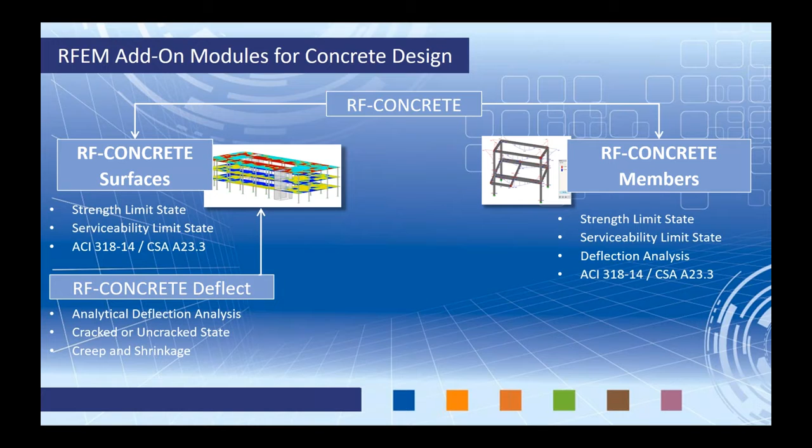Now, as I just mentioned, we do have the add-on module extension RF-CONCRETE Deflect. So RF-CONCRETE Surfaces is required in order to activate this module extension. This allows us to take a look at the analytical deflection analysis of 2D surfaces in the cracked or uncracked state with consideration to creep and shrinkage.

And finally, we have the module extension RF-CONCRETE Nonlinear. Now, this is applicable to both the surfaces and members module, and this allows us to run a nonlinear calculation for the serviceability state only in the cracked state. So we won't be using analytical equations or factors, but we'll actually come up with the cracked section properties and rerun this within the stiffness matrix to account for those nonlinearities. Now, we won't be getting into this today, but just keep that in mind that that is a possibility if you're looking for it.

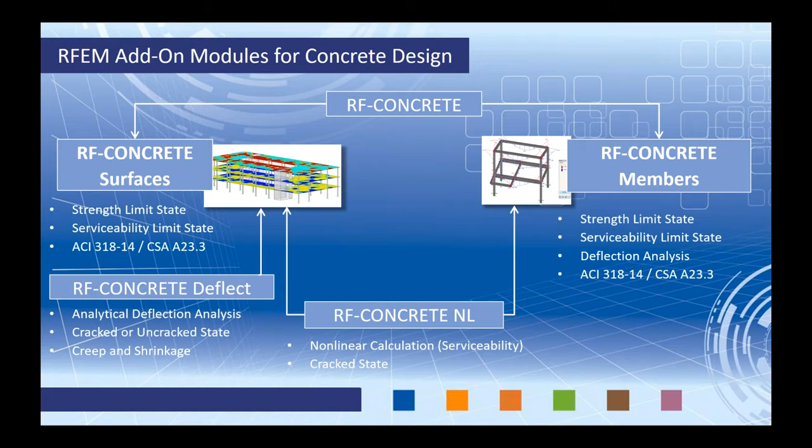So we are ready to jump into our example today within RFEM. So for the sake of time, we won't be able to model the structure from scratch, but rather I went ahead and created this two-story concrete building.

And you'll notice that we do have several surface elements. The surface elements comprise our elevated slabs at both the first level and our roof level. Now, those same 2D surfaces are also utilized for wall elements, and you can see these in the vertical direction here. Surfaces do allow you to apply any type of opening within them.

So you can see that this might be some type of garage opening. We have openings for our doors, for our windows, and for our stairs. And this is all accounted for within the analysis.

Now, you'll also see here these symbols, light blue here, that are located at the joints where our vertical walls intersect our elevated slabs. So what exactly are these? Well, this is what's called a line release. A line release can be placed on any line element within the model, but in particular, we have added them in at this joint where the walls intersect the elevated slabs.

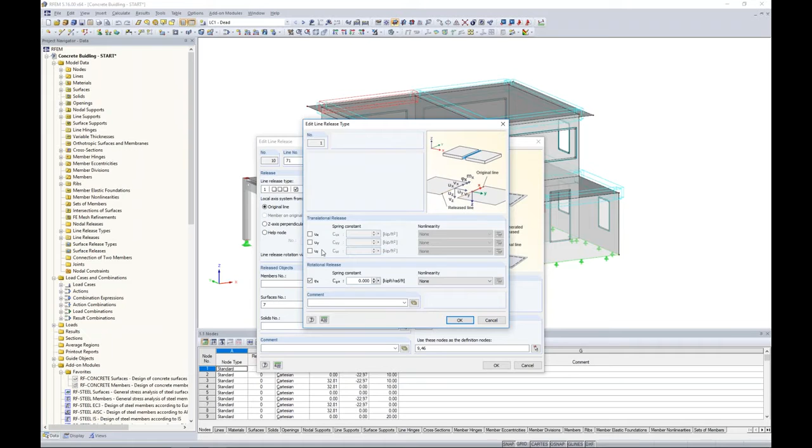The line release type, if we open up the detail settings here, has completely released the moment. So we will not have moment transfer at that joint. You'll notice we also have translation here in the local X, Y, and Z. Keep in mind that these are the local axes of the line element itself.

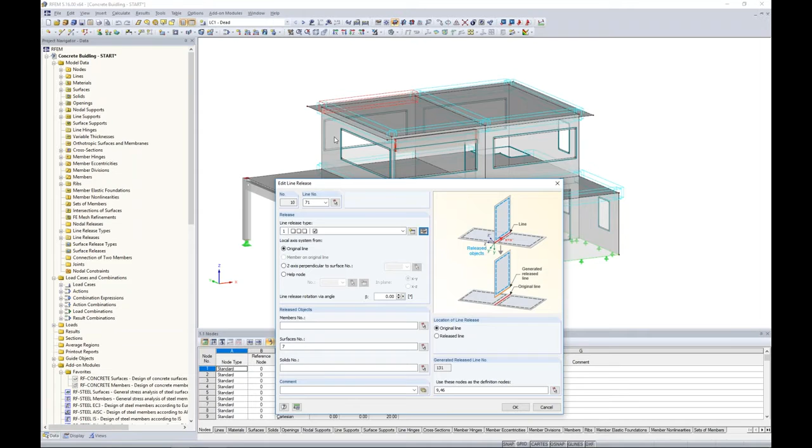Then we just simply apply it to a particular line. We release the objects, and in this case, it's surface number 7, which is my vertical wall on the other side. So now we won't get any moment transfer between those walls to the slab elements.

Under the display settings, we can scroll all the way up here to the top and we can turn those off. So they'll still be taken into effect within the background, but if it seems to get in our way when we're viewing this graphically, then we can go ahead and turn on and off elements like those within this display option.

So moving on to the members, also within this display in our Project Navigator, I'm going to scroll all the way to the bottom. Here we can change the graphics, the colors in the graphics, according to some different elements.

And the one I'm going to choose today is the member type. So the member types are 1D member elements within our software, but you'll notice that they are color-coded because they are different types of members. The first one to notice are our columns, and these are the member type beam.

Well, a beam within RFEM is just any typical type of member, such as a normal beam or normal column. Nothing too fancy going on there. So that's why these typical columns just have the member type beam.

Now, in turn, we have these pink colored members, and these refer to rib elements. Looking at a rib element, we can see here the member type is set to rib. We can expand the detail settings here, and what a rib allows us to do is to define the effective width on either side of the beam element with the slab modeled adjacent to it. So here we can set the effective width either as L/6, L/8, or we can manually type that in.

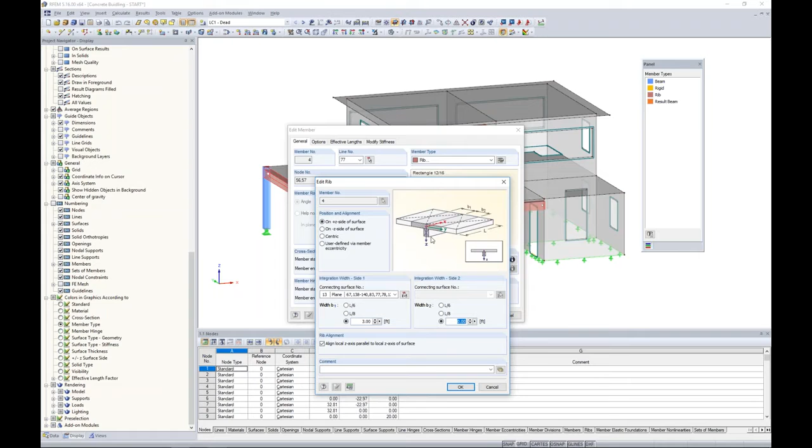But we can fully consider the effective stiffness here for the slab element with the beam, and later on we can even design this rib type member in our RF-CONCRETE members module.

The last type of member that I want to point out is something that we call a result beam. Now, a result beam is very special in the sense that we're not actually modeling any type of beam member within this model when we're using a result beam. It adds absolutely no stiffness to the structure.

But I have placed it above this wall opening, which we can see here, highlighted as the wall with the opening, and I placed this result beam right above it. Well, what a result beam does, if we double click on it and we take a look at the expanded settings, it will actually integrate the stresses and forces within a cuboid. So I've set this cuboid to 2 feet 1 inch in the vertical and horizontal direction.

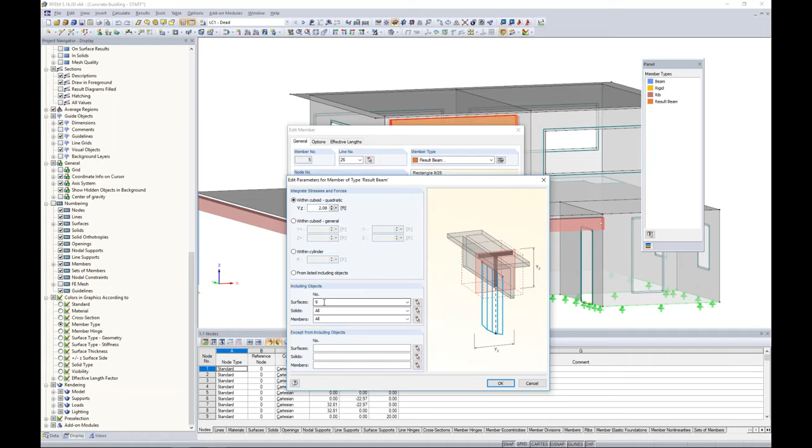So now everything within that cuboid will be integrated and presented to me in a beam-like fashion. We can include only certain objects. So in this case, I only wanted to include my wall, surface number 9. Therefore, I'll get all of the internal forces, stresses, deflections above that wall opening, or spandrel, as we'll call it. And we'll take this into the RF-CONCRETE members module later.

Now, something else to notice about result beams, you don't necessarily have to define it as a concrete member. It could be timber, it could be a steel rod. It doesn't matter because, remember, we're not adding any stiffness. But the reason why I've set it to a rectangular concrete material for this particular case is because I do want to take it into the RF-CONCRETE members to design it later on, which does require concrete shapes and materials.

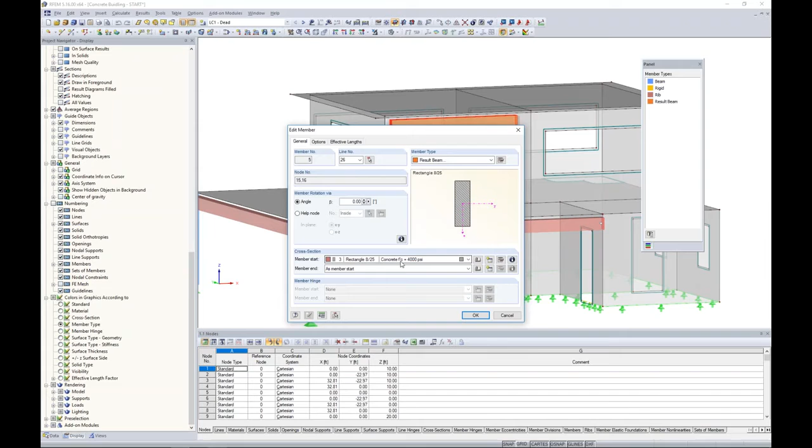Now that we've covered the basics of surface and beam members, let's talk about I-cracked. I-cracked is simply the gross moment of inertia multiplied by a factor, which comes directly from table 6.6.3.1.1(a) within the ACI. The ACI requires us to take into consideration cracked section properties. This factor varies for each element, whether it's a column, beam, or surface. By default, the program automatically uses the gross moment of inertia.

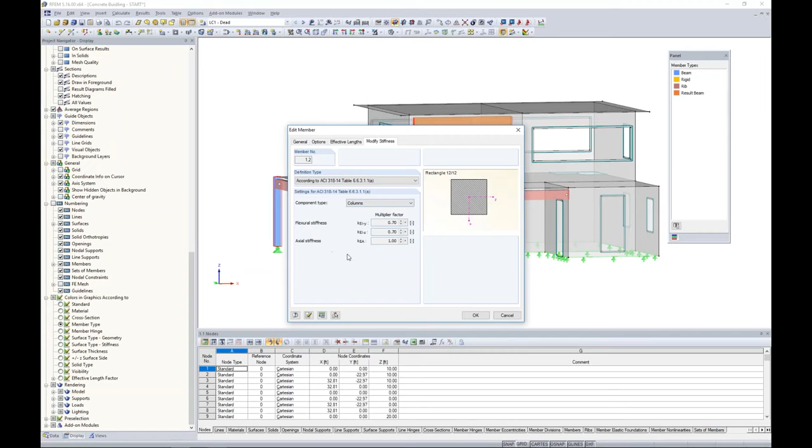So how do we change that? I can highlight both columns at the same time and double-click to edit them. Here we have a Modify Stiffness tab. Within this drop-down box, you'll see both ACI and CSA, since the concept is the same for both standards. Within the ACI, I use the drop-down box to select columns, and the multiplication factor from table 6 within the ACI is applied to my flexural stiffness. That's how we account for I-cracked.

The same thing needs to be done for our rib elements. I highlight both, choose the Modify Stiffness tab according to beams, and the program is smart enough to recognize what type of element it is from this drop-down. We also want to do our elevated slabs, so holding down the control key, I select all horizontal slab elements, edit the surface, and even for surfaces we have a Modify Stiffness tab according to the ACI for flat plates and flat slabs.

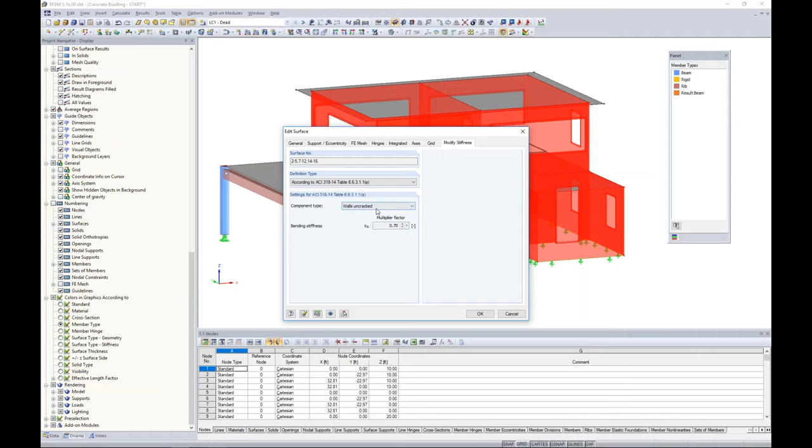We click OK, and last but not least, we have our wall elements. I can graphically choose these with my selection box and right-click to edit these surfaces. Again, under the Modify Stiffness tab, the program gives me the option for walls uncracked or walls cracked. We'll go ahead with walls uncracked for this example today.

You'll notice I did not apply an I-cracked consideration to my result beam. The reason is that we're just creating a summary of the forces and stresses within this wall panel. I've already considered I-cracked for the wall, so there'd be no reason to also do it for a beam type element. In fact, if you look at the result beam, we don't have a Modify Stiffness tab anyway to make that change.

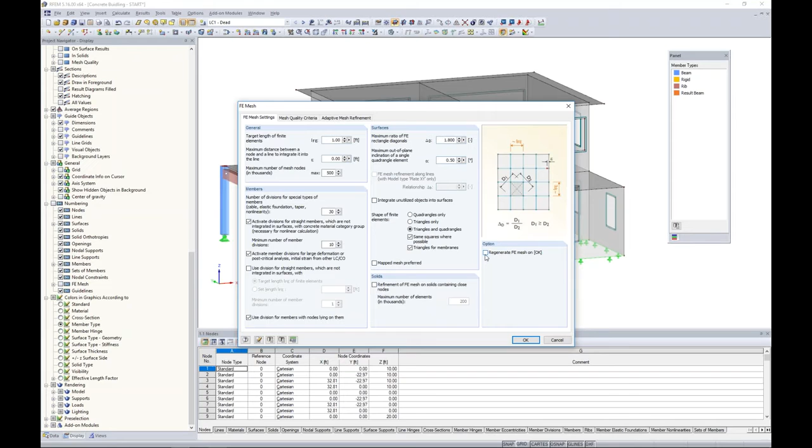One more concept to look at before the loading is our FE Mesh. Under Calculate FE Mesh Settings, the global FE Mesh is by default set to 1 foot. You can adjust this as necessary, but taking a look at the 1 foot mesh setting today, we can regenerate the FE Mesh.

Let me turn this into wireframe view. You can see the program automatically meshes everything for us — nodes, members, openings, everything is automatically meshed and tied together, so we don't have to take care of any of that manually. Keep in mind you don't even need to mesh the model before running an analysis; this will automatically always be done. I just wanted to give you an idea of what's going on in the background.

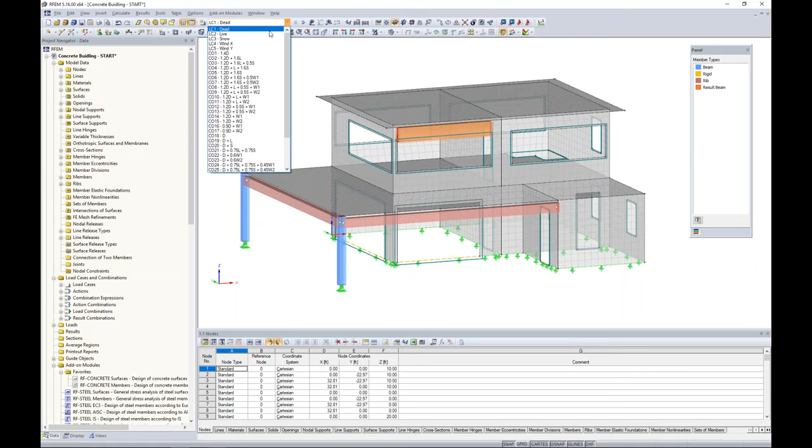Lastly, let's look at the different loads I've placed on this structure. I've applied different loads according to dead load, live load, snow load, and so on. These are just simple surface loads. For dead load, you can see those acting in the vertical direction on all elevated slabs. Same concept for live load, but only applied at our second level inside the building.

Snow load, I've accounted for some high drifts closest to the wall surface bases, in case we want to take into consideration the analysis for high snow loads. You can see those applied here. Lastly, we have our wind loads. We can see an external pressure being applied in the global X direction, as well as some wind loads applied on the inside of our structure for an outward pressure. Same concept for wind in the Y direction, except we're just rotating the directions 90 degrees, so we have wind in the global Y direction with the surface loads applied.

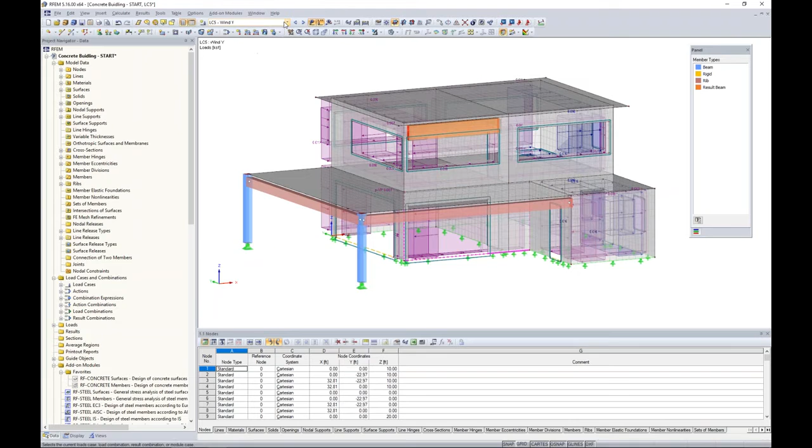Now jumping to the load combinations, I can open up my load combinations tab. We can see here the program has automatically generated all of my LRFD load combinations denoted by this orange color. The program has also created my ASD load combinations. Both of these combinations are going to be used later on for design within the concrete modules.

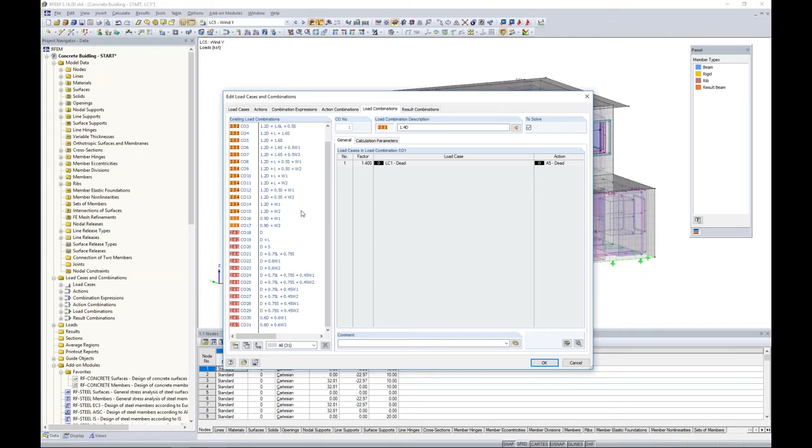If we jump back to RFEM, we'll see all of these same load combinations available in my dropdown, and I can actually see the loads being applied stacked on top of each other, one by one within these load combinations. The load factors are also considered here graphically.

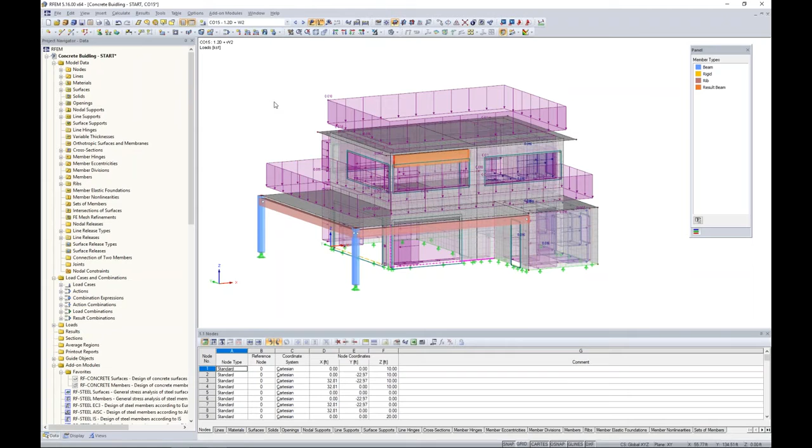So now we're finally ready to run our analysis. What I can do is just go to calculate all, and the program's going to cycle through, first of all, my load cases and then all of my load combinations. Keep in mind, for load combinations, the default is a nonlinear analysis taking into account secondary effects such as P-delta. So for every iteration, our stiffness matrix is being adjusted to account for those P-delta effects. We're also taking into account those stiffness modifications from I cracked.

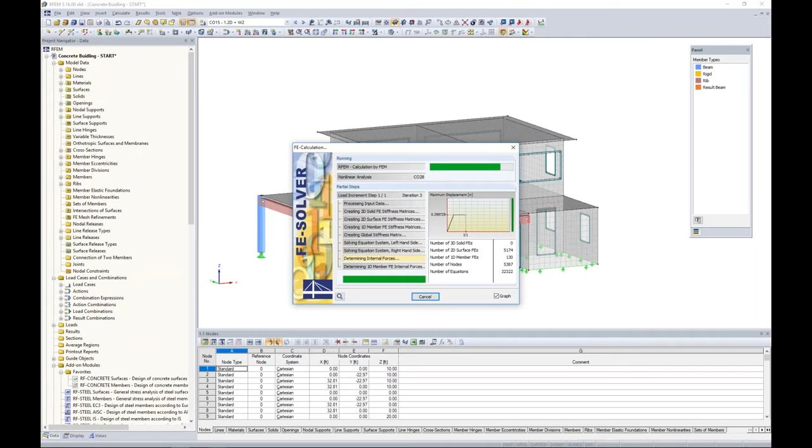Once the analysis is done running, we will be presented here with our results directly in RFEM. The results are available here under the Results tab within the Project Navigator, and we can quickly take a look at our deformations. Turning this into wireframe view, we can cycle through these different load combinations up here in our toolbar, and for the most part it looks like gravity loads are affecting the structure.

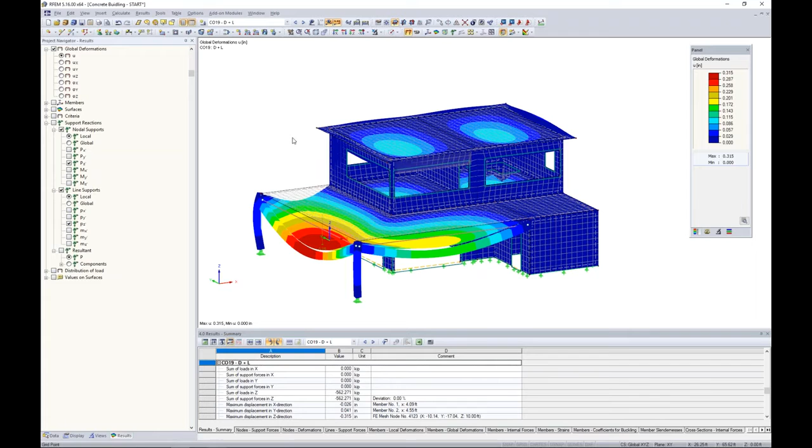Deformations aside, we're most likely for concrete design very interested in internal forces, especially for our members. So what we can do here is jump to the members tree within our Project Navigator to go ahead and display the internal forces. For example, I'm looking at the axial loads within my column and my rib members.

We can also take a look at shear loads, maybe we're interested in that for those rib members. Bending moments, of course, we want to use for our tension reinforcement design, and so on.

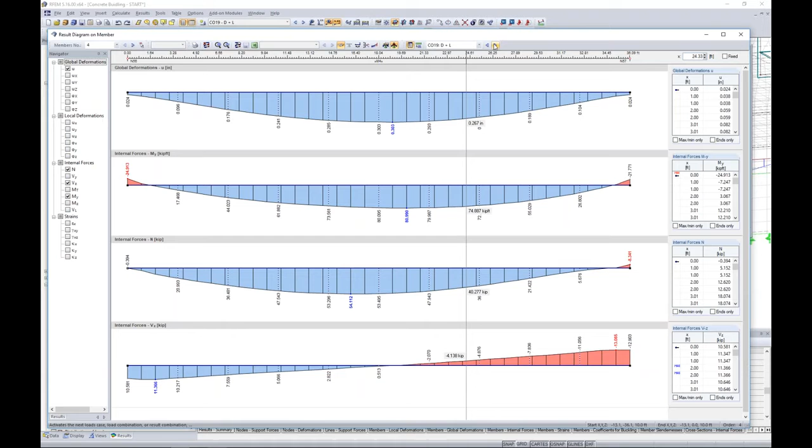We can always right-click on one of these members to go to the results diagram. The results diagram allows us to turn on these internal forces and to see a little bit more detailed look at what's going on along the member length. We can also quickly cycle through different load combinations to see how those forces are changing.

The other thing I want to point out is remember our result beam up here. Let me create a visibility by my selected object here of just my result beam. Remember that this is integrating the stresses from my wall element and presenting it to me in a beam type format. So this is actually the area above my wall opening.

I can view normal forces, I can view the shear forces, even the bending forces all along that wall segment. So again, this is what we could take, not only for the result beam but for all beams, into our own design tools to take a look at the reinforcement design with these internal forces.

The same can be said for support reactions, and let me make this a little bit more clear here. Our support reactions are given to us within this results toolbar, and we can take this into our own design tools to do the foundation design if we'd like.

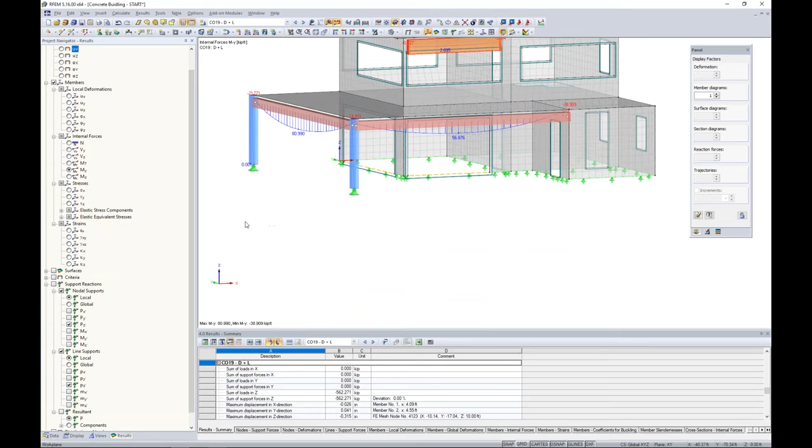So that really summarizes our analysis. Again, I haven't touched any of the add-on modules. This has all been done in RFEM alone, which provides us with a full analysis.

So now we want to change topics and jump to reinforcement design utilizing these add-on modules within RFEM. Going back to my data tab, we can see here the long list of add-on modules available. This is why we have the concept, kind of pay for what you use, because not all people are going to utilize all these add-on modules.

We can always right-click and move a module up to the top of the list by selecting it as our favorite. Also, under the add-on modules option up here at the top of the screen, they're categorized a little bit better so we can see design by concrete and launch the RF-CONCRETE members module.

Now when I say add-on module, it's nothing more than a dialog box available within RFEM itself. All of my loads, my load combinations, my cross sections, my materials are all brought in from RFEM, the main program, into this add-on module. The only thing that we need to define here is a little bit more information about our reinforcement specific to the ACI standard so that the program can go ahead and design that for us.

The first thing to note here is we want to choose the standard. You'll see in this drop-down box we have both the ACI and the CSA standard, as well as Eurocode and a couple others.

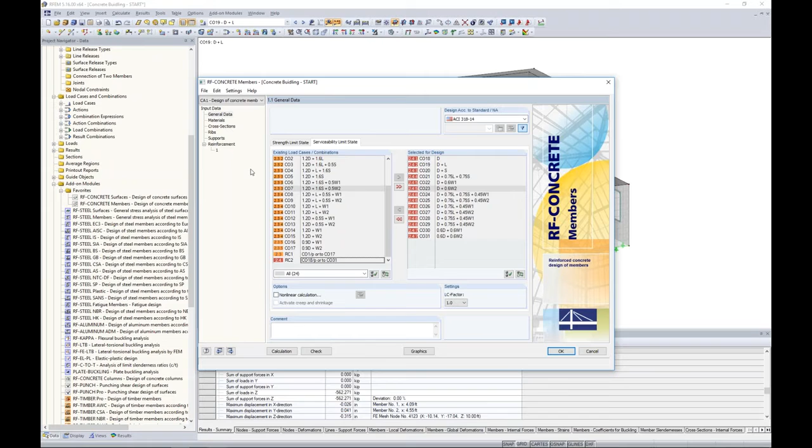Now we just simply need to move down our list here from top to bottom. Moving on to materials, concrete 4000 PSI is brought in from Rfem. Our reinforcing steel is set to grade 60. Material properties are all given to us here, not too much to change.

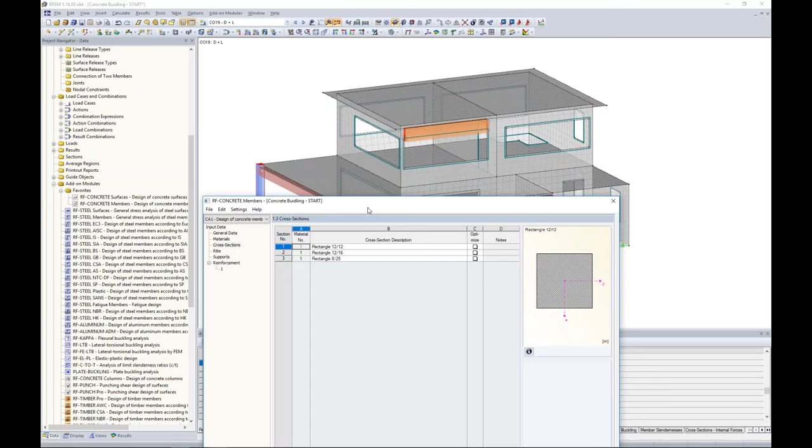The cross sections, same concept. These are my cross sections directly from the Rfem model. Now I know it's a little bit difficult for you guys to see, but as I click through these different cross sections, they are being highlighted in the Rfem model behind me, so I can see exactly which cross sections are located at which parts of the model.

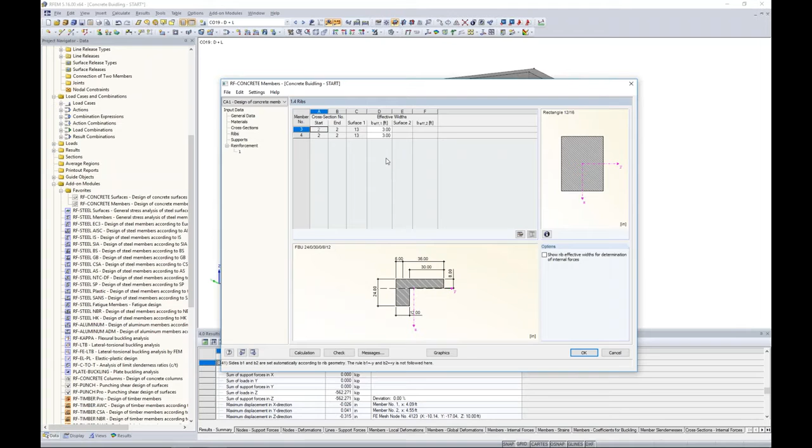The ribs tab is those rib members that we created with the effective width. Remember, I defined an effective width of 3 feet only on one side of my rib member. So that's all brought in from Rfem. Now this is important because we can do the reinforcement design of this effective width section here.

The supports tab is utilized by first graphically selecting a couple nodes. So I'm going to choose both nodes at either end of this rib beam here in the front of my structure. The reason for that is that I want to define my support width, which in this case are my two columns. My columns are 12 inches wide, so we can type in 12 inches for the support width.

Is the column a direct support? What's nice is that this picture updates to let you understand exactly what you're selecting. So is the column underneath the rib, or is the rib framing into the face of the column? In our case, we'll assume that the rib is framing into the side of the column. Is it a monolithic connection, yes or no? And is it an end support? Well, in both of our cases, we'll choose this as an end support.

So the intent of this table is to allow us to reduce the shear forces in the support area according to ACI 9.4.3.2. The code tells us that we can consider the rib element at the face of the column, or even more so a distance of D away from that face, D being the depth of the rib. The shear forces at that location will be used for the shear reinforcement design. The ACI allows us to do that, so in order to not over design the shear reinforcement, we can activate that option here.

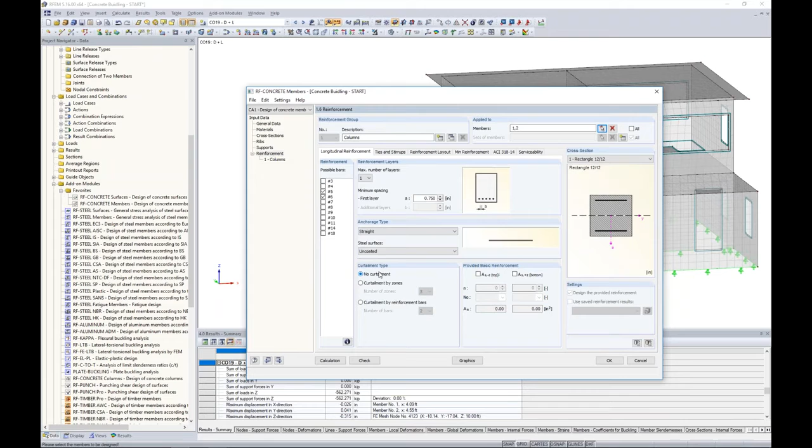The anchorage type is our development length, so do we prefer this to be straight, hook, or a bend? The program will give you all of the dimensions for that based on the ACI standards as well as our applied internal forces. The curtailment type allows us to specify different areas within the member length that might need additional longitudinal reinforcement. A good example of this might be our rib member.

Our rib member is going to have significant bending at the center, but much less bending at the end. So you can set different curtailment so the program can optimize where to put that longitudinal reinforcement in different zones. The option for no curtailment will use the same longitudinal reinforcement throughout the entire length of the beam.

Ties and stirrups, same concept. We just want to choose the possible bars here. For these columns, I'm going to choose number 3s, and we're going to use uniform spacing throughout, which is the default option here. Now, the program can also take into consideration the max stirrup spacing according to the ACI standard, so it will either flag us or design it to make sure we're not exceeding that particular code check within the ACI. The reinforcement layout.

The first thing to set here is the concrete cover. The ACI standard refers to table 20.6.1.3.1 for concrete designation, and for number 5s or smaller that are exposed to weather, the code tells us that 1.5 inches is adequate. So assuming we're using number 5s here, we'll just keep this as the default of 1.5 inches. If the program came up with number 6s for my reinforcement, well, maybe I'd want to go back and adjust this to something more like 2 inches.

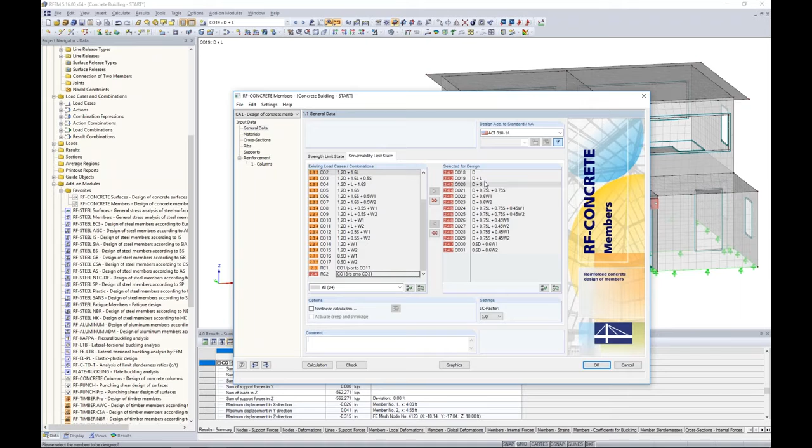Now, lastly, we have our Serviceability tab. Keep in mind, this Serviceability tab is only available because back under the General Data tab and the Serviceability Limits, I've actually utilized my ASD load combinations. If I did not have load combinations over on this right side of this dialog box, then I would not see this Serviceability tab. But today we are designing serviceability according to the ASD load combination. So there are two considerations when it comes to serviceability: we have cracking and deflection.

With cracking, the first thing to specify is the limit value for allowable crack width. Utilizing this first option, limit values, my drop-down box has a few default options, and this comes from the ACI committee, which did some research and put together recommendations depending on where your structure is located and how it's going to be used. For example, water retaining structures are going to have a significantly lower allowable crack width of 0.004 inches in comparison to a structure with a protective membrane or that's located in a dry air environment. For today, let's assume that cracking is not such a concern for this structure. We're in a very dry environment. We don't expect it to see very much cracking anyway. So we'll just set the limit values as 0.016.

Now, user defined, you can manually type in the allowable crack width as well. So below this are two different checkboxes: design without direct crack width calculation according to Chapter 24. The ACI does not specifically give us any type of equation or references when it comes to the actual crack width. Instead, it tells us that we must limit the reinforcement spacing in order to control cracking. So by leaving this checkbox checked, we will check the spacing of the reinforcement to make sure we're adhering to the ACI standard.

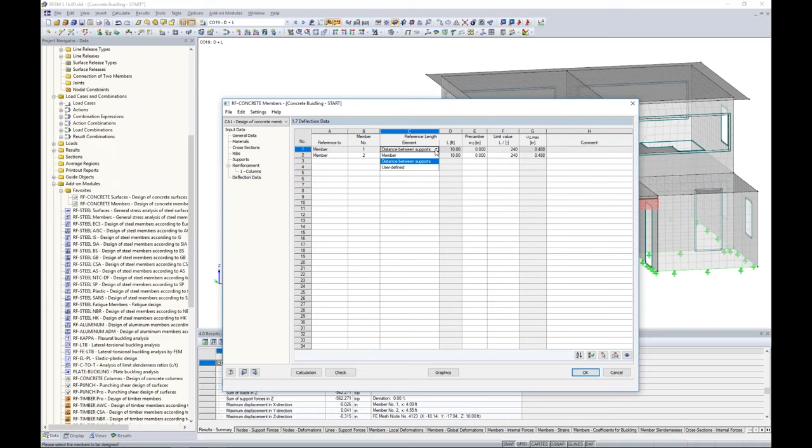Under the deflection data, not much to do here because the program already recognizes that we need to add both columns to this table, member 1 and member 2. The reference length is set as the distance between the supports, the full 10 feet. You can also modify this with these drop-down options. If we did have a pre-camber, we could put that in.

And finally, the limiting values. The drop-down box has a few options directly from the ACI standard, or you can type in your own user-defined value. Utilizing L/240 again from the ACI, I'm telling the program that I cannot exceed a deflection of 0.48 inches. So it will compare the demand deflections from our analysis to these limiting deflections and give us a capacity ratio for serviceability.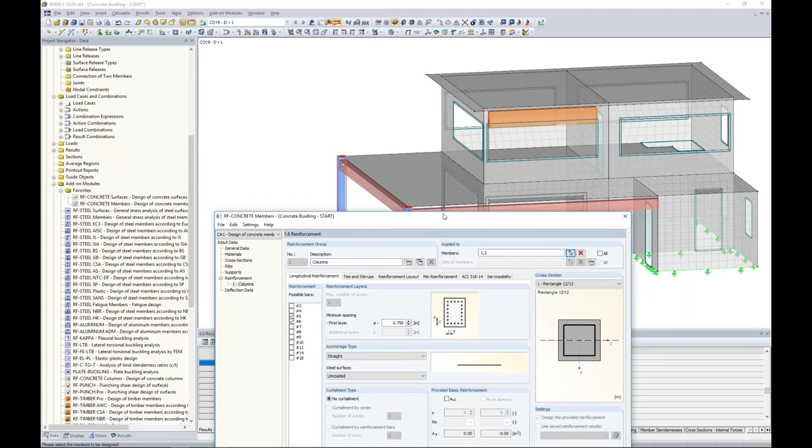So that was a bulk majority of our input information within this module. Now keep in mind, this is only for the columns. So what I'd also like to do is design my ribs and my result beam at the same time. Well, we can do all of this in one continuous step by simply creating a copy of my reinforcement group.

So now my columns are defined here twice. All I need to do is go to a second group, and we'll rename this to ribs. Now for the members, I need to graphically choose my rib members that I'd like to apply this to. As far as the rest of these tabs, most of this will remain unchanged.

For example, the longitudinal reinforcement will still let the program optimize between number 5s or number 6s. The ties, maybe I'd like to increase this to number 4s. I expect to see higher shear here, of course, in comparison to my column, so we'll increase this to number 4s.

And let's use different zones. So therefore, the program will optimize in 3 different zones the spacing. Areas where we have higher shear will have closer tie spacing. Areas where we have lower shear, of course, will have further away tie spacing.

The reinforcement layout, the cover is fine, but the reinforcement layout, well, this is not correct. We certainly don't have a column situation where we need uniformly surrounding reinforcement. So instead, we're going to choose symmetrical distribution.

So you'll notice now we're giving reinforcement at the top and at the bottom, which is more beam-like behavior. For rib elements, we now have the option to distribute the reinforcement over the complete slab width. So we're also going to extend this longitudinal reinforcement over the effective width of our slab. Pretty powerful in the sense that we can design these rib elements directly within this module too, taking into account that effective width that we input in the RFEM model.

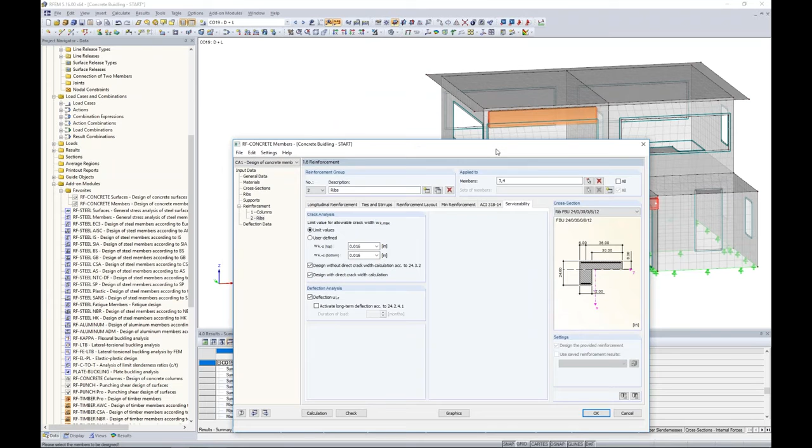Okay, and finally, we have our result beam up here. Now remember, we're just designing the upper portion of this wall above the opening as a spandrel, and we do so by mimicking that it's a beam type element. So creating a copy now of my rib reinforcement group, and you can see here now I have columns, ribs, and my third option, we can rename this to spandrel. Here I can select my member, my result beam graphically within the RFEM model.

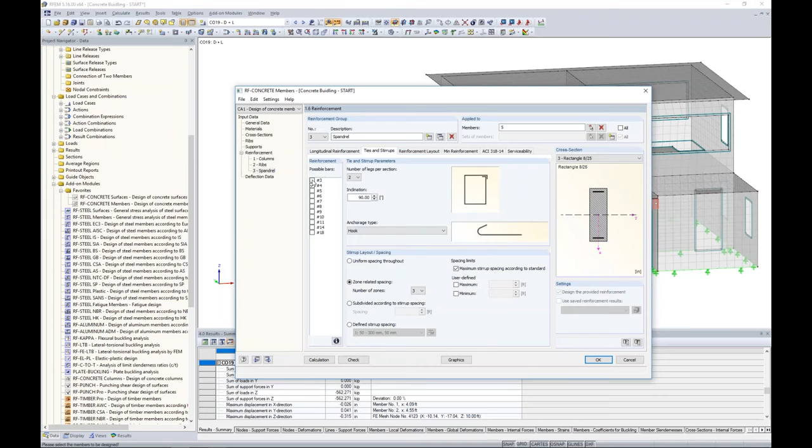And jumping back to my longitudinal reinforcement, this looks fine. My ties and stirrups, maybe we'll jump back to number 3s here with uniform spacing. Everything else remains unchanged. Even the reinforcement layout, by the way, this will look the same as our rib members, but our cross section was updated here.

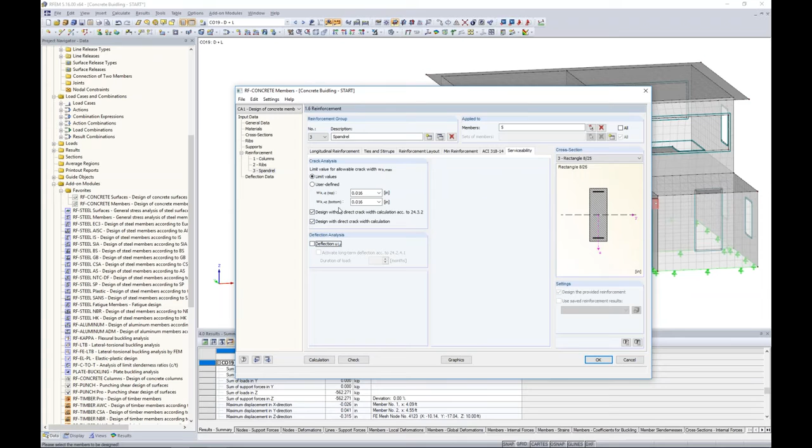Top and bottom reinforcement - the only thing I'm maybe not so concerned about is serviceability with deflection consideration. You can uncheck these options for different reinforcement groups. So I still want to check my cracking, but I don't really care much about deflection. I can simply uncheck that, and now that member will not be included in the deflection data table.

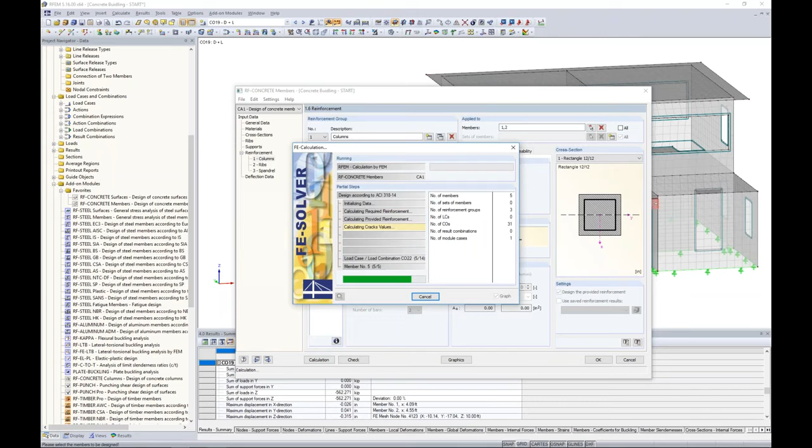Now we've finally defined all of our reinforcement settings for our members, and we can run a calculation. All this is doing is pulling the internal forces from RFEM into this add-on module, applying the ACI equations to give us our actual reinforcement details for each member. You can see it solves fairly quickly.

Now we're presented with our results in table format. The required reinforcement is given first, and we can check it out by member. Again, these tables are synced up in the background with the RFEM model, so we can see exactly where we're at within this structure.

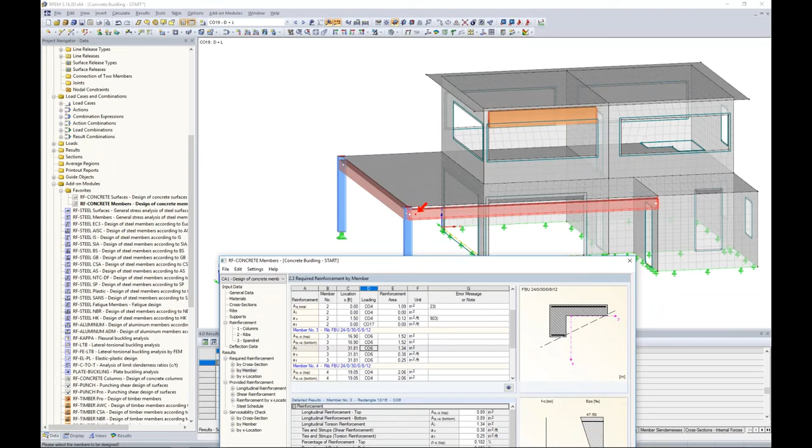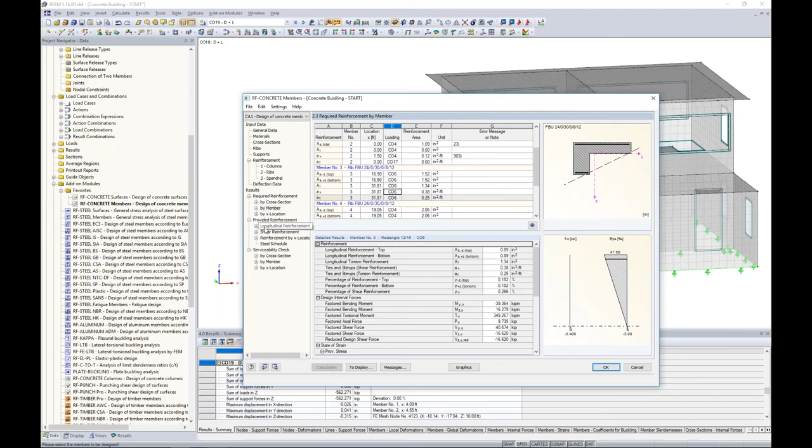Taking a look at our rib members in particular, we'll see the required reinforcement based on the applied loads for the AS top given as such. Now AS bottom, this is all longitudinal reinforcement. We're also given our requirements for shear reinforcement and torsion. So required reinforcement is good to know, but we're probably more interested in what rebars did the program lay out for these particular members in regards to the settings we previously defined.

This is where the provided reinforcement tables can be useful. Here we can see these same members defined. For example, taking a look at the longitudinal reinforcement for my columns, I can look at my rib members here, and we can zoom in to see the longitudinal reinforcement applied at the bottom and at the top.

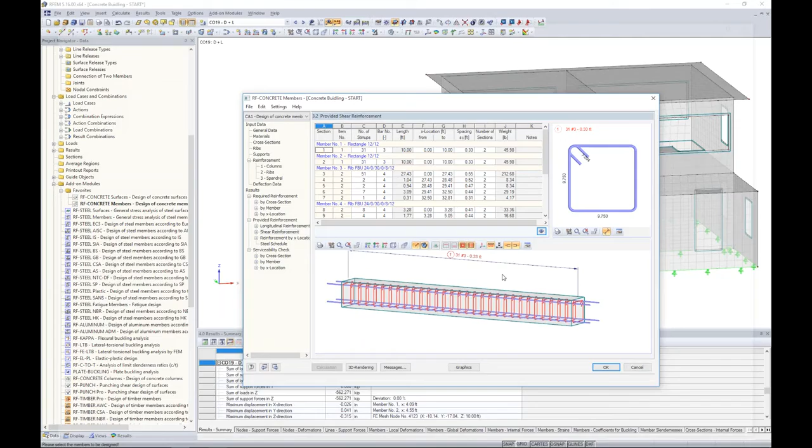Shear reinforcement, same concept - we can see our ties, our stirrups placed along the member length, 31 number 3s at 4 inches on center. For these 3D drawings, you can always double click on it, and up pops a nice rendering of exactly what our reinforcement looks like for both the longitudinal and the ties.

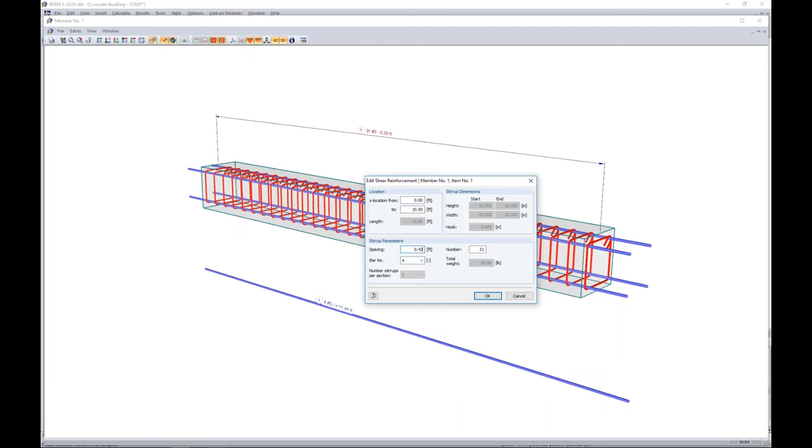If you want to make quick changes - for example, I'd prefer to use number 4s rather than number 3s - I don't necessarily have to go back to my original input data. I simply double click on this call out, and I can change the bar number to number 4s, and maybe increase my spacing to 0.425 feet on center. I click OK, and the program automatically updates the picture.

I can exit out of this picture, and when I click into another table, the program says, wait a minute, you made a change, I need to quickly recalculate this to make sure you're still meeting all the ACI limitations. So I've made that change to my shear reinforcement for my column - it's reflected here with 24 number 4s, but I'm getting a note now, which I can read under my messages or in the lower dialog box: the bar spacing is greater than the maximum spacing. That's telling me something doesn't adhere to the ACI standard, so maybe I need to go back to number 3s or decrease my settings there.

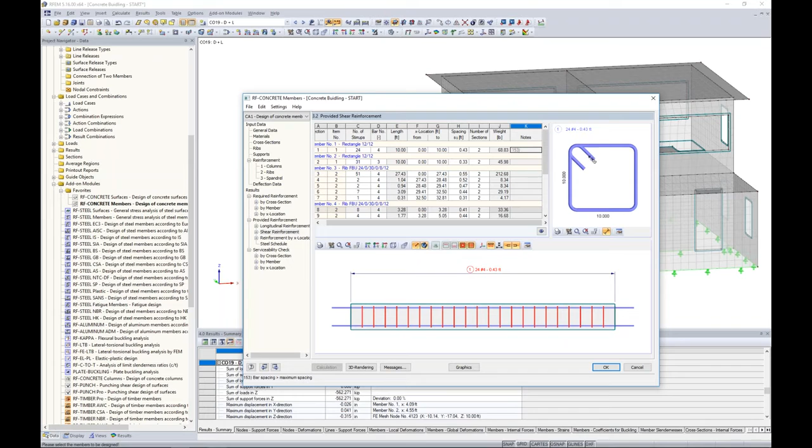Lastly, we have our serviceability check. Remember, we were checking deflections, and also the spacing of our reinforcement and the crack width. Ultimately, for our different cross sections and members, we're getting a capacity here for serviceability. It looks like in this case, the deflection is controlling at the mid-span, denoted by this big red arrow for our rib member, and we get a serviceability check of 0.94 - but we're still less than 1.0, so we get our nice green smiley face.

The tables are nice, but it's also beneficial to see what's graphically going on within our module or within RFEM. What we can do is click on the graphics button down at the bottom, and now we're back within RFEM, but still technically in this add-on module - you can see we're in RF-CONCRETE members.

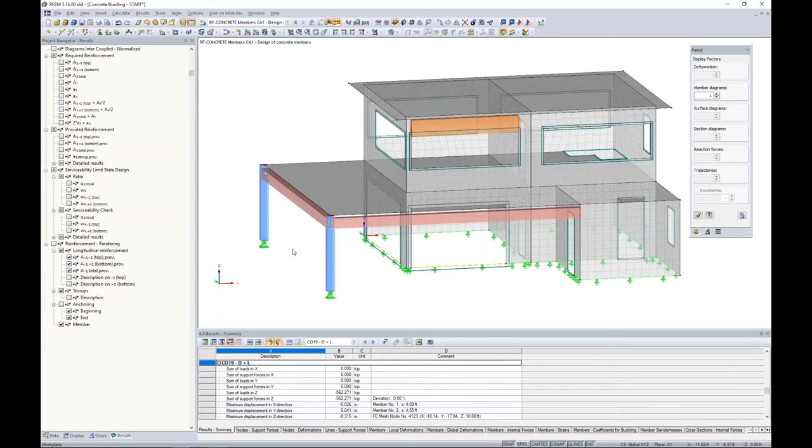So this is all my reinforcement results details from the module. Now focusing in on a rib member, we'll highlight it and create a visibility by selected objects. Let's turn this into wireframe view and zoom in here a little bit. For this rib member, we can display a diagram of our required reinforcement at the bottom of this member - this member is in positive bending moment, so we need reinforcement on the bottom, up to 2.06 inches squared per foot. That's just the required reinforcement.

Well, I can overlay on top of this the provided reinforcement. So this is what the program has determined to put into this beam member with our number 5s, and it comes out to 3.88 inches squared per foot. You can see the provided reinforcement should always be greater than the required reinforcement. Otherwise, we should be a little bit concerned with our concrete design not meeting the minimums.

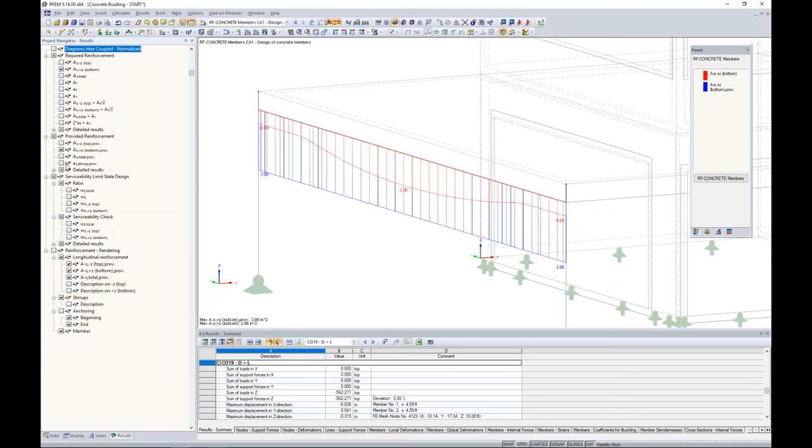Now you can go ahead and display all these different diagrams. What's also beneficial is we can display the rendering of the reinforcement for both the ties and the longitudinal reinforcement directly within the model. So we can see here, even with these rib members, we're able to see the longitudinal reinforcement within the slab. Shear spacing, our 3 different shear spacing zones are displayed here. Now any of this can be added to our printout report for recommendations on how the overall rebar reinforcement design will be done.

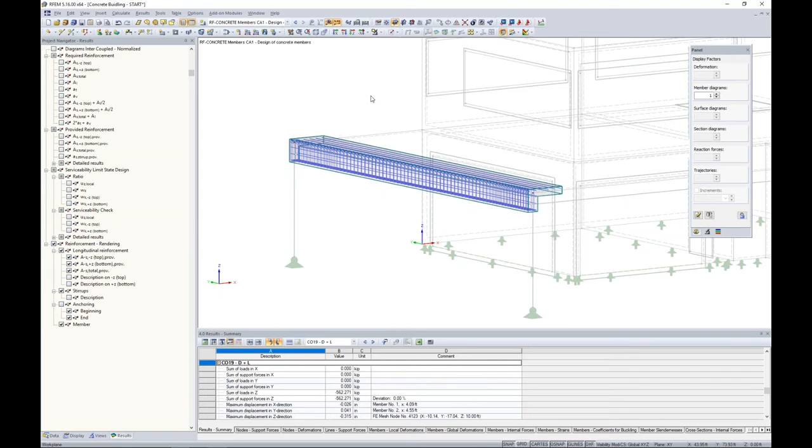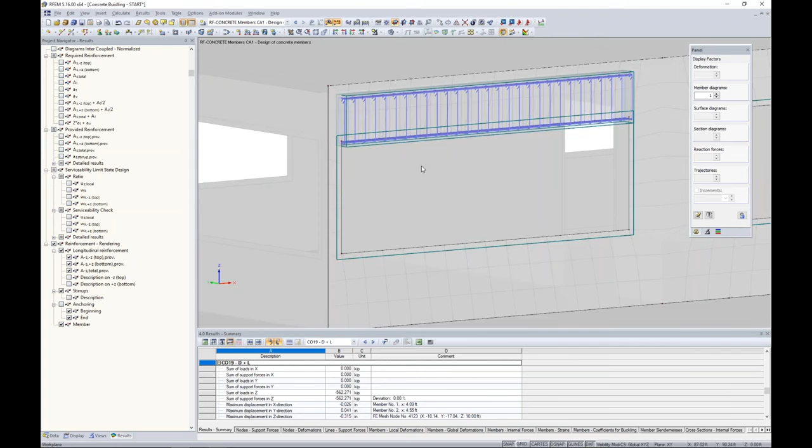Okay, so the other thing to quickly point out is our result beam. We're going to cancel out this visibility mode, and maybe we highlight our result beam here along with our wall panel, create a visibility by the selected object. So here we can actually see the reinforcement above that wall opening. It was designed like a beam member. So we have our longitudinal reinforcement shown here, we have our stirrup shown, and this is all meeting the design demands of this wall panel above the opening. So again, this is how result beams can be utilized along with surfaces.

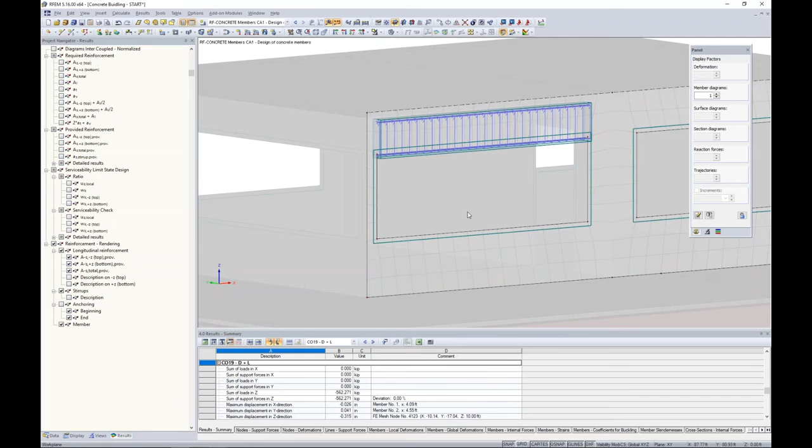Okay, so now we have completed the member design. We're also interested in the surface design. So for this, I'm going to cancel out my visibility mode, and we'll turn to the normal view here of Rfem, and we'll jump to RF-CONCRETE surfaces.

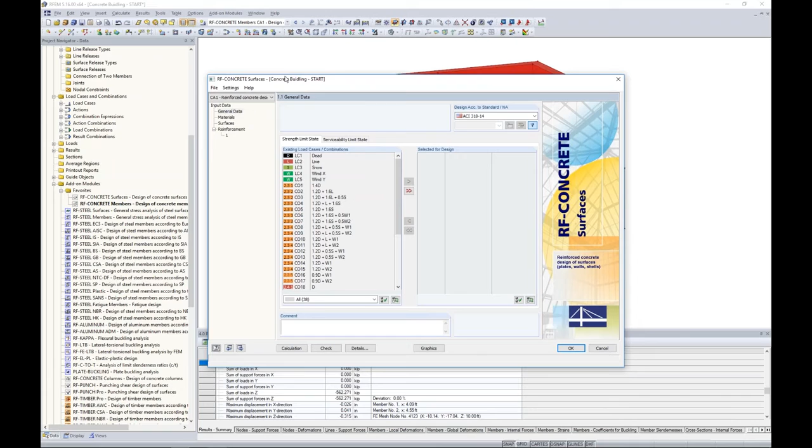So this is our second add-on module today. Now this add-on module is truly almost identical to RF-CONCRETE members. Once you grasp the handle of one module, you'll certainly understand what's going on in the other. We're going to choose the ACI standard from our drop-down box here. The strength limit state design, we will choose our LRFD load combinations, and serviceability, we will choose our ASD load combinations.

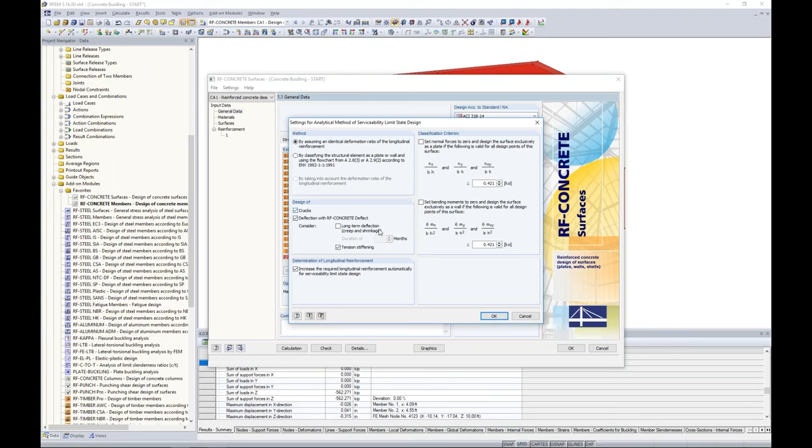Under the serviceability limit state, this is where we can go into these edit settings and activate the RF-CONCRETE deflect module. This is the module extension that allows us to check deflection considerations for our 2D surfaces. Now you can also activate long-term deflection or turn it off here, and the design of cracks will also be included. We also can get into nonlinear analysis with the module extension RF-CONCRETE nonlinear, which we won't be doing today, but this is where you also activate it for the serviceability limit state design.

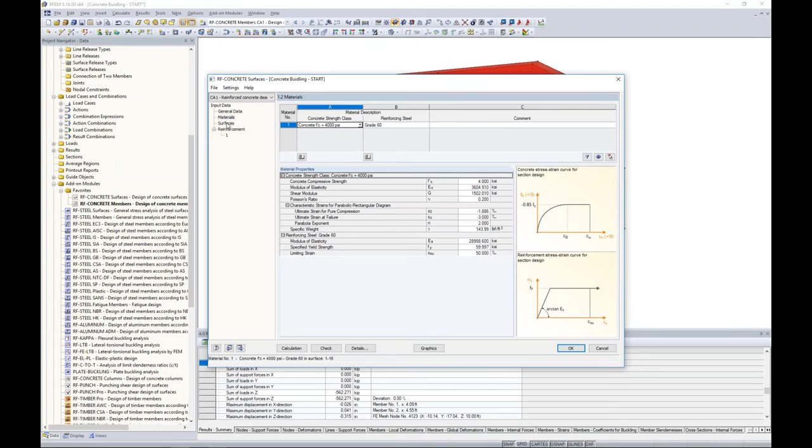So again, just moving from top to bottom with our tables here. Our materials, 4,000 PSI, grade 60 reinforcing steel, everything looks great there. The surfaces table is really effective for our serviceability design. This has information on our deformation and crack widths according to the surfaces.

So the first tab here, deformation analysis, is only available because I have activated RF-CONCRETE Deflect. Here we type in our limiting deflection ratio. You can see the default is set at L over 250, so I can manually change this deflection ratio here as well. As far as L, this will be measured by the minimum boundary line, the maximum boundary line, maybe a user-defined value, or what I'm going to do in this case is tell the program I don't want any deflections of my slabs or my surfaces to exceed 1.0 in this case.

So that's the absolute deflection here. Now you individually can set deflection ratios for each surface, or you can apply them all at one time. The limit of crack widths, this should look very familiar. This is exactly what we just saw with the RF-CONCRETE members module. We can set our limiting values here according to the ACI committee for a dry air structure of 0.016 inches. We can design the reinforcement with spacing considerations according to Chapter 24, as well as run the Gergely-Lutz equation to give us our actual crack width and compare it to the limiting value set here.

So nothing different here. Moving on to reinforcement. The first thing we want to do is again define our reinforcement group. We're only going to have time to do our walls today, but keep in mind the design of the elevated slabs is identical to what I'm about to show you. You just can create a second reinforcement group if you'd like. So this is not going to apply to all surfaces, but rather I'm just going to design these two outer perimeter shear walls here. So we can select them graphically, surfaces 14 and 15, and I click OK.

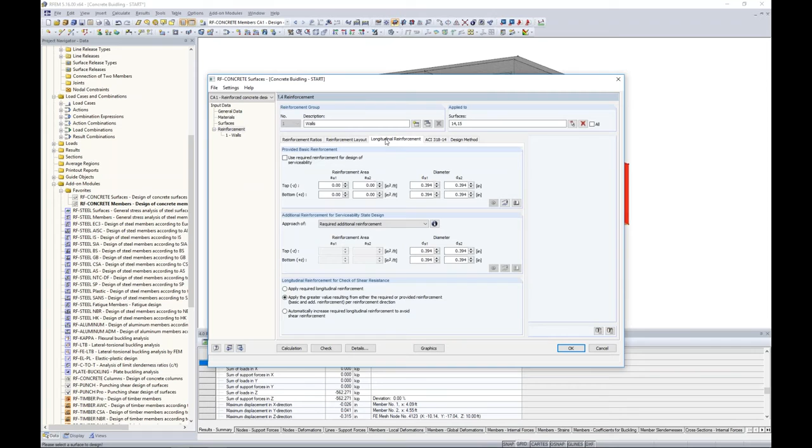For longitudinal reinforcement in my wall elements, I want to apply number 5s at 12 inches on center. That is my provided basic reinforcement I'm going to put in here. I can input that information for the top and bottom as well as the diameter of my rebar, but we can also utilize this helpful tool here.

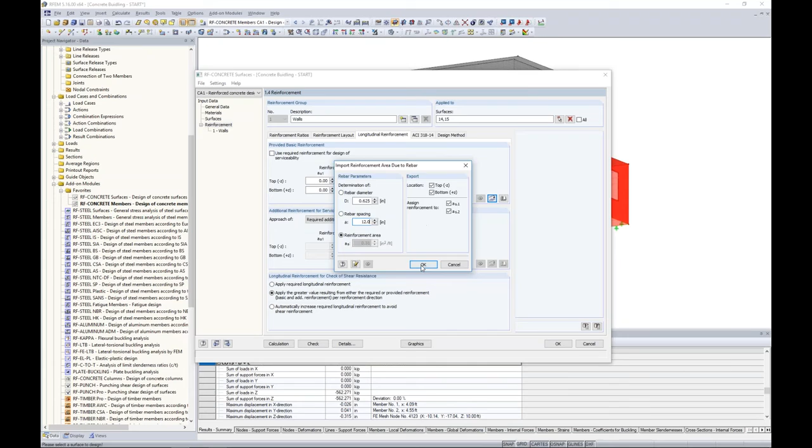With this tool, I can choose all options for top, bottom, and both directions. I can specify my number 5 rebar diameter, which is 0.625 inches, and set my rebar spacing as 12. Once I click OK, the program will automatically calculate my reinforcement area and set my diameter according to those settings. Nothing further to do with my number 5s at 12 inches.

Now these next two settings are interesting. The program is going to first run through the ultimate or strength limit state design. If it determines that my number 5s at 12 inches are not adequate, it will automatically increase this reinforcement, and this will be our new required additional reinforcement.

Once the strength limit state design is done and we move on to serviceability, what do you want the program to use? Do you want it to use our number 5s at 12, or do you want it to use the required additional reinforcement? All of those options are available within this drop-down box here.

So I'm telling the program: if number 5s at 12 are not adequate, let's go ahead and use whatever the program suggests I need to additionally add to these wall segments. Same thing with the check of shear resistance—apply the greater value from either the required or provided reinforcement.

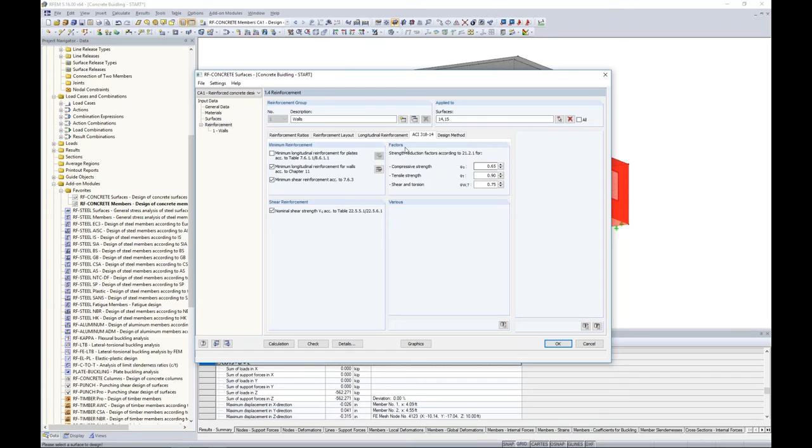The ACI tab just has some references directly to the standards. For example, we want the minimum longitudinal reinforcement for walls according to Chapter 11. Minimum shear reinforcement is given here, as well as the nominal shear strength of our concrete according to Chapter 22. Strength reduction factors from Chapter 21 are given by default directly from the ACI, but you can adjust those here.

The design method will leave this as the default. We have optimization of design internal forces, and the parentheses give you the information you need: this is recommended for parts loaded mostly by bending or tension, in comparison to parts loaded by pressure. So we'll go ahead and leave this option here.

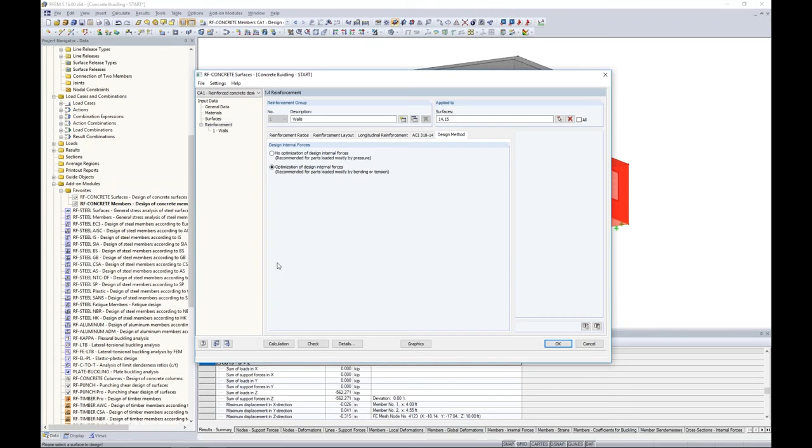Now we're finally ready to run our calculation. For the sake of time, I'm going to jump to an already solved model, because we have several FE elements now, which is much different than our members, so it takes a minute to solve. We'll jump to the results, which are provided within this add-on module with the results tables.

The first thing I want to look at is my required reinforcement by surfaces. Once I run my calculation, I see my two surfaces listed here. The first one is surface number 14, on this far side back here. Surface number 14 shows me my required reinforcement within this column—this is just what's required based on the applied forces.

No problem. Basic reinforcement is my number 5s at 12 inches—this is what I told the program to input as the basic reinforcement. My third column is all zeros, because my number 5s at 12 inches are completely adequate for this particular wall, so I don't need any additional reinforcement. My number 5s at 12s are fine. I could maybe even consider increasing the spacing or decreasing the bar size to be a little bit more competitive here.

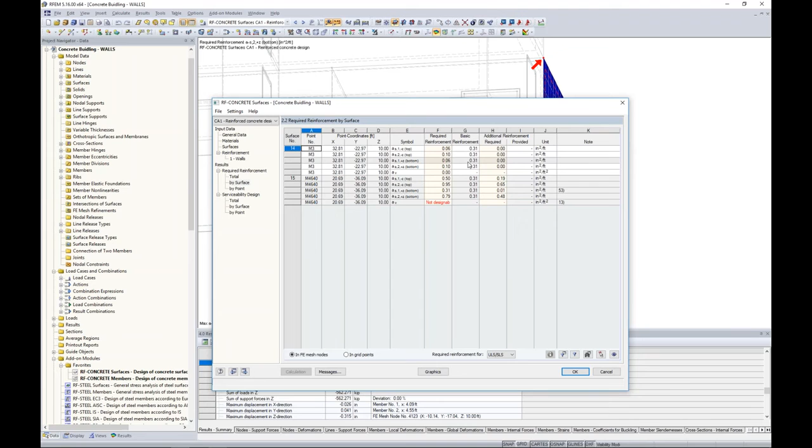Now, looking at wall segment number 15, it is a very different story here. Looking at the required reinforcement, I have values clear up to 0.95 inches squared per foot. That's a whole lot of reinforcement.

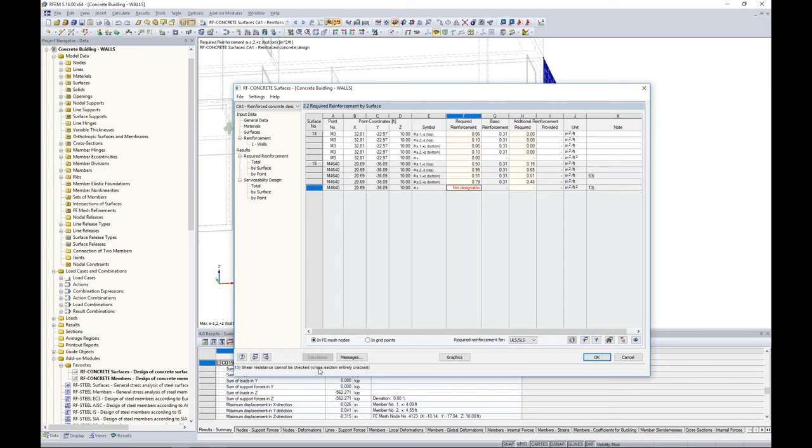So my number 5s at 12 inches listed in my second column here are not even going to be close to this. In my third column, the program's telling me I need to put quite a bit more reinforcement into this wall. Then if I take a look at my shear reinforcement design, the program's giving me a not-designable message. It says down at the bottom, the shear resistance cannot be checked - the cross section is entirely cracked. Well, this raises a red flag to me.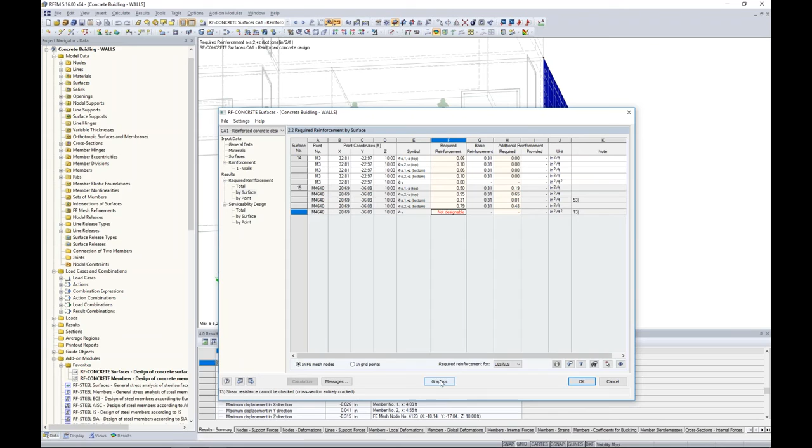These two wall panels are very similar. Why is wall number 14 passing with flying colors? Everything is totally content with the number 5s at 12 inches, but then when I look at number 15, it's not even close - it's failing by quite a bit. So this tells me that I need to maybe take a look at my graphics within the RFEM model here to see what's going on.

Remember, I'm still in this add-on module, RF-CONCRETE Surfaces. I'm just viewing my results graphically here back in RFEM. So we'll take a look at our required reinforcement, which I can choose within my tree here. And now I'm viewing the required reinforcement for both the top and bottom and in both directions, and we can see the direction indicated by the red arrows there.

You'll notice as I cycle through these, the wall panels themselves, for the most part, require very little reinforcement, but we definitely have a problem up here in this corner. Very, very high reinforcement is required. So this tells me that we have an issue called a singularity.

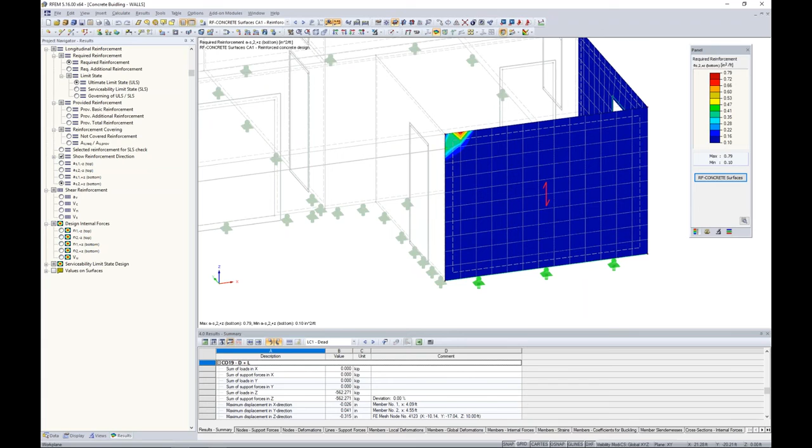Now, if we look at this corner here of this wall panel, we have this additional wall panel framing in from 90 degrees. Remember, we have our rib member framing in all to this teeny tiny FE mesh point in the corner. In reality, this is not just an issue within RFEM, but with all finite element analysis software - the load isn't going to be distributed at this one single little mesh point, but rather we're going to have better load distribution in real life.

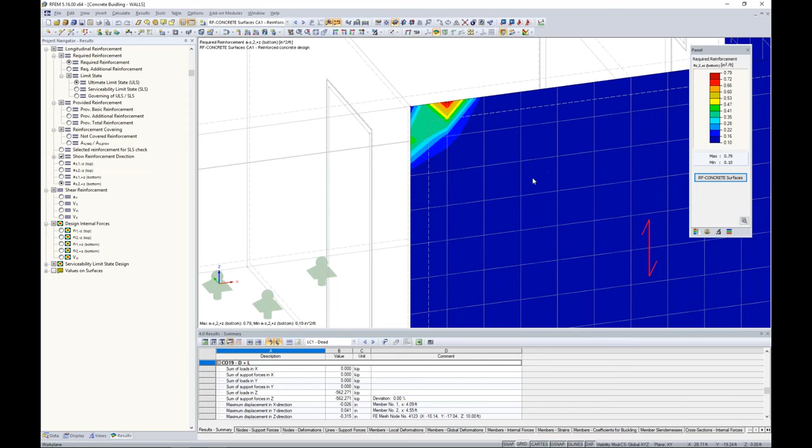So what can we do in our model to take care of these high peak areas? Well, the first thing to know is that my FE mesh elements here are pretty large at 1 foot. So maybe I want to refine my FE mesh at this corner point.

Well, I can do this by right-clicking on the node. I can edit or create a new FE Mesh Refinement. I choose the definition type here, and you'll notice the program already chooses the node option because that's what I've highlighted in the model. I'm going to give the FE Mesh Refinement a radius of 3 feet. Now, on the inner side of this FE Mesh Refinement, I want 1 inch. And then as the outer mesh refinement, I would like it to transition back to my global settings of 1 foot. And I click OK.

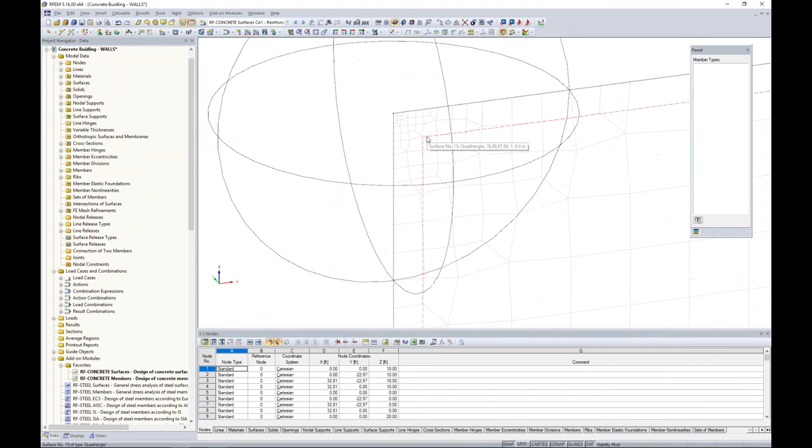Program tells me it needs to clear the results. So now we're presented with this FE Mesh Refinement symbol here. I can go to Calculate, Generate FE Mesh, and maybe if I hide my objects in the background and zoom in here, we can see that the FE Mesh is much smaller at this corner now. Then it transitions nicely back into that 1 foot setting. So some nice automated features here.

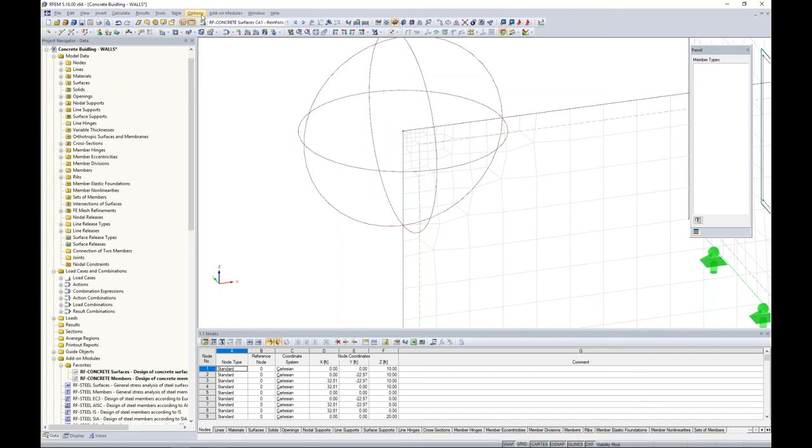But because we've completely changed the FE Mesh, the program does need to rerun the analysis way back in RFEM. Our internal forces are inevitably going to change when we make changes to our FE Mesh. So I'm going to go to Calculate, Calculate All, and again, for the sake of time, we'll just jump to an already saved model here.

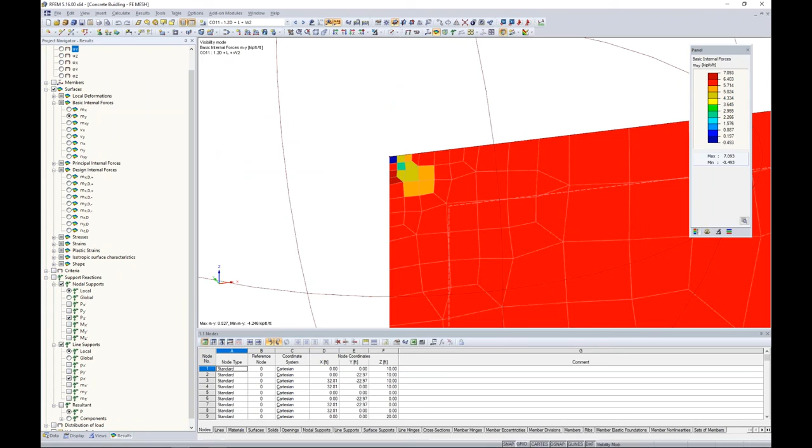So we've refined the FE mesh, but how do we get better distribution over these high peak areas? Well, under the Data tab, we have a nice feature called Average Region.

If I right-click on Average Region to create a new average region, this allows me to specify which surface I want to apply it to. I can click on the wall panel itself, surface number 15. I want a circular average region, so the picture updates nicely here.

I choose where to place this average region, which we'll place right here in the corner, and the nodes are automatically entered with the correct coordinates into this dialog box. The dimension will be 3 feet, so 1.5 radius is what we'll consider, and the program is going to automatically average out the results within this region. So I can click OK.

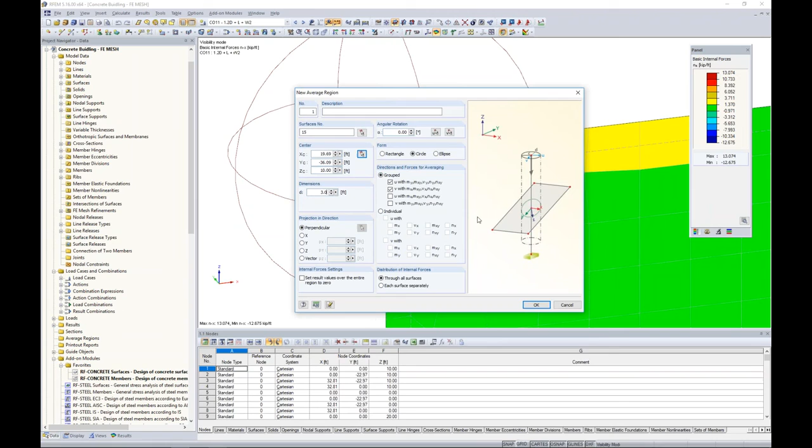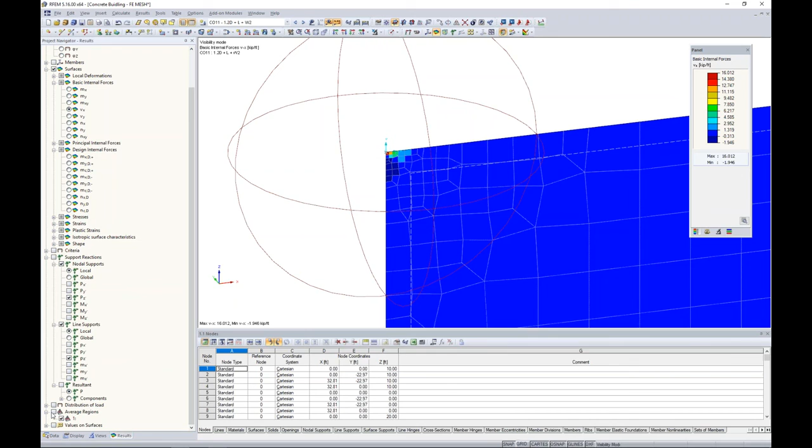Now I don't even have to rerun my analysis. The program can automatically average out those regions. So when I go back to my internal forces for shear, without the average region, we have a shear force of 16 kips per foot. Now I can activate this average region at the very bottom of my results panel. My shear went from 16 kips per foot to 0.44. That's a significant drop. So average regions can be incredibly useful for regions where we're dealing with singularities.

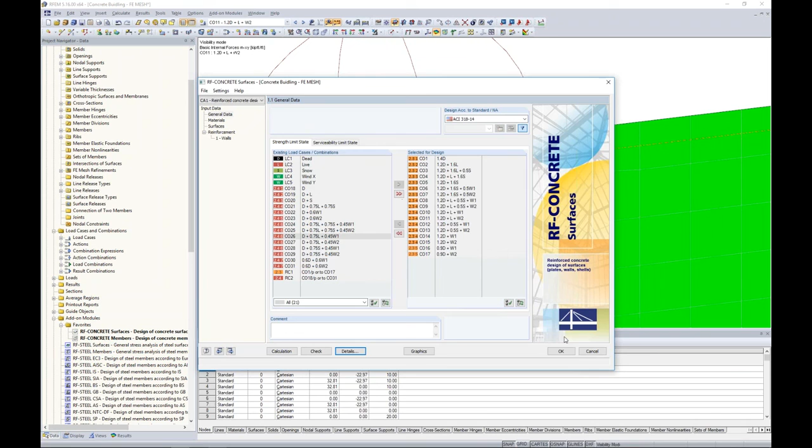The same goes for any of these internal forces. So now we've taken into consideration better load distribution, averaging out those high peak areas. We've done that for RFEM, but keep in mind that under the RF-CONCRETE Surfaces module, the program will still automatically use those high peak areas unless we go under the Details tab and choose this option to apply the average internal forces for ULS and SLS calculation. Now the program will use those averaged internal forces for our reinforcement design, and we're ready to rerun our calculation.

I already have the results saved here within the RF-CONCRETE Surfaces module, taking into consideration the average region, and now we can see much more realistic results for my second wall panel. For surface number 15, here is my required reinforcement. We're no longer seeing 0.95 inches squared per foot; the greatest area we're seeing is 0.3 inches squared per foot. Now my number 5s at 12 inches are completely adequate.

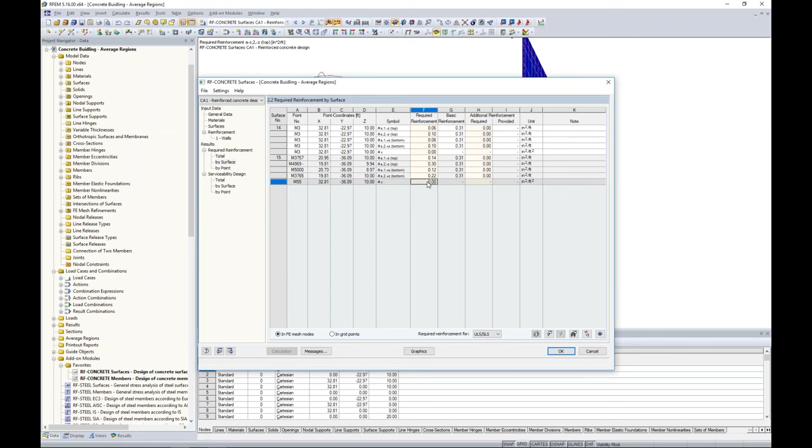I don't even need any additional reinforcement here. Even my shear reinforcement—I don't need any shear reinforcement. What I provided in the program is adequate. I don't have any non-designable errors telling me the entire cross-section is cracked.

Now, lastly, we can view this information graphically again, and take a look at the required reinforcement in the different directions. We still have areas with higher internal forces, which is fine—this probably stems from our rib and panels framing into it behind this particular wall. But we're not looking at 0.95 inches squared per foot anymore; we're looking at a max of 0.3 inches squared per foot. So that is much more realistic.

Okay, so that really summarizes, rather quickly, member and surface design within RFEM.